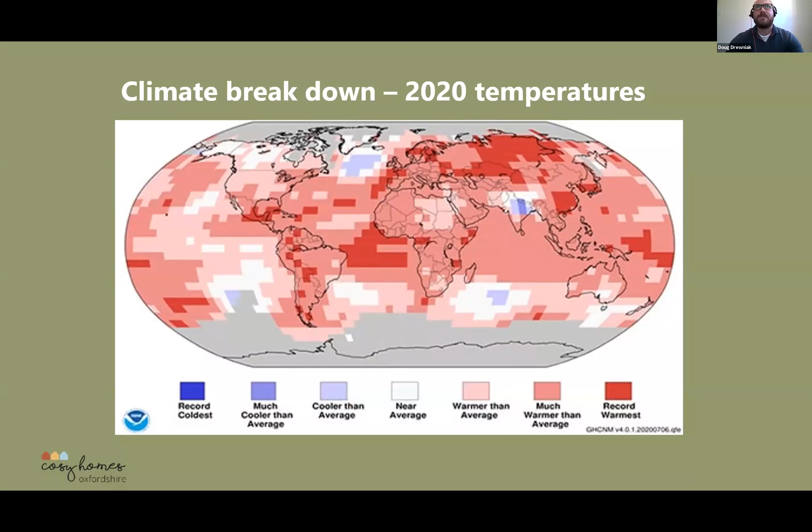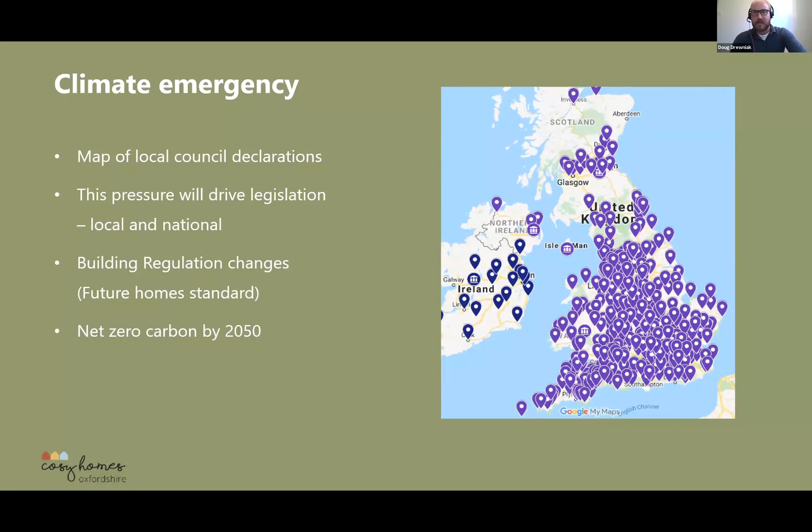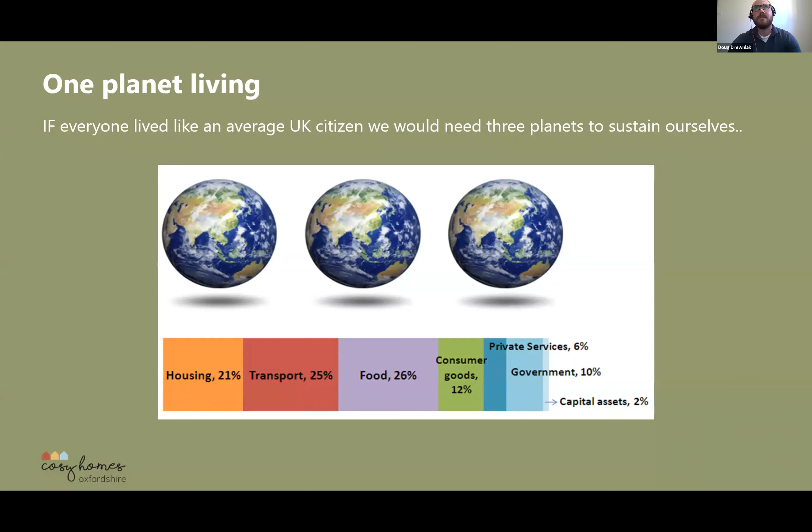A quick note on One Planet Living. My previous job was with Bioregional, and you might have come across that sustainability framework. The basic concept is that if everyone lived like an average UK citizen, you would need 3 planets to sustain our lifestyle. You can see a breakdown of where energy and resources are currently spent, and housing is a huge portion of that. The figures constantly change, but it's around a quarter of that impact we're looking at in terms of energy use in homes, plus all the resources spent fitting out and building new homes. So it has a pretty big impact.

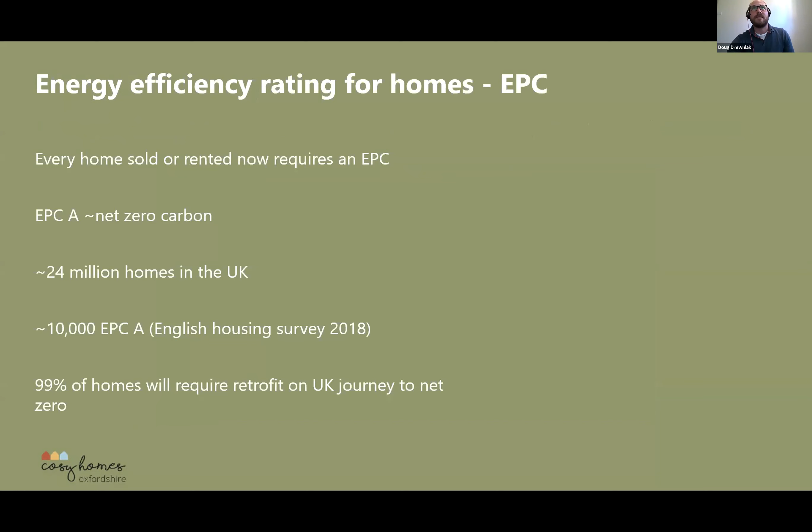So where does energy efficiency come into this picture? This is an example of EPCs, the energy efficiency rating scale you're probably aware of, this colored scale. Every home that is sold or rented now requires one of those certificates. I've already mentioned the drive to net zero by 2050, which means we're looking at all homes, both existing and new, to eventually have an EPC of A, that's 92 points and above, the very top green bar.

Currently, estimates in 2018 by the English Housing Survey, annually produced by National Statistics, suggest there are about 10,000 EPC A-rated homes in existence. If you think the current housing stock of the UK is probably in the range of 24 to 25 million homes, 99% of homes will need to be upgraded, made more efficient, for us to reach net zero carbon by 2050. That's the scale of the problem we're trying to address with retrofit.

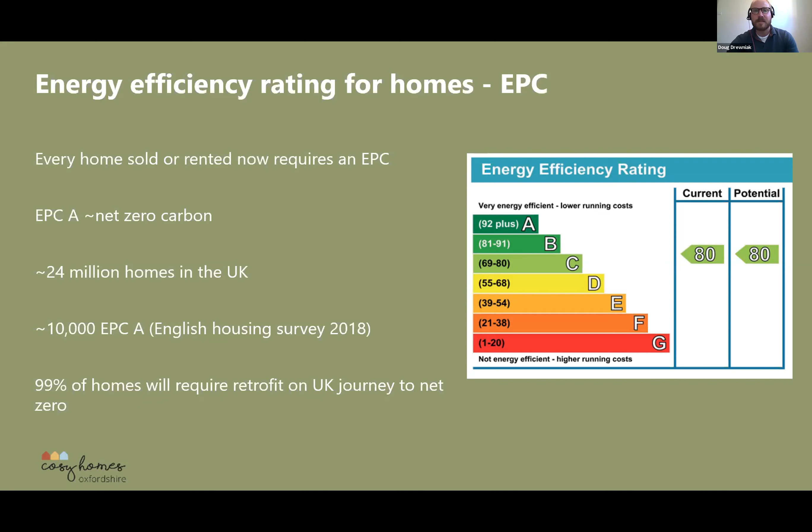Now going into the main part, an introduction of retrofit and an explanation of energy efficiency in various aspects. Retrofit, a very simple definition, is adding or changing something to your home that you didn't have when it was constructed. It's usually aimed to make your home more energy efficient, more comfortable to live in, and cheaper to run in terms of bills and outgoings. The works can consist of exterior works, interior works, and can also cover building services, such as a new heating system, more insulation, or better windows typically. That's the kind of measures we are going to go through in detail today.

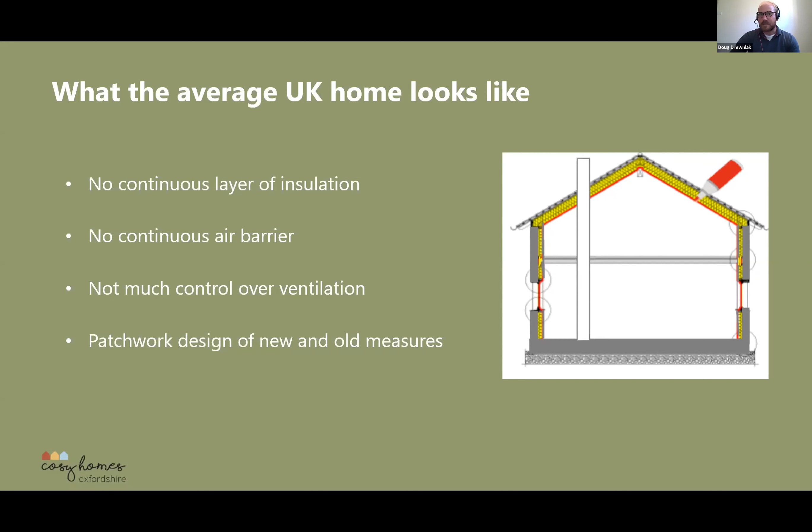So you haven't got a continuous layer of insulation - this yellow line is not continuous. There's no continuous or designed air barrier in most homes, and not much control over ventilation. Ventilation increases and decreases depending on things like wind, weather, and the type of construction. So you've typically got a patchwork design of new and old measures that haven't really been holistically thought out, just added at various stages of the existence of that building. That is typically the starting point.

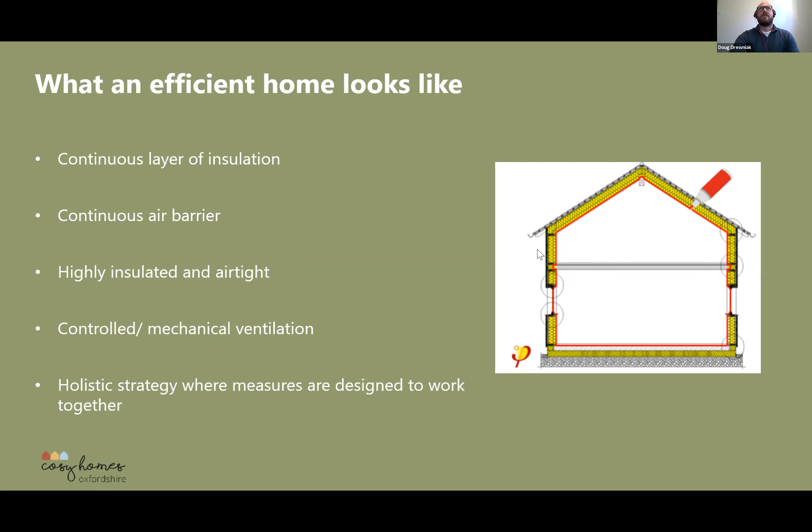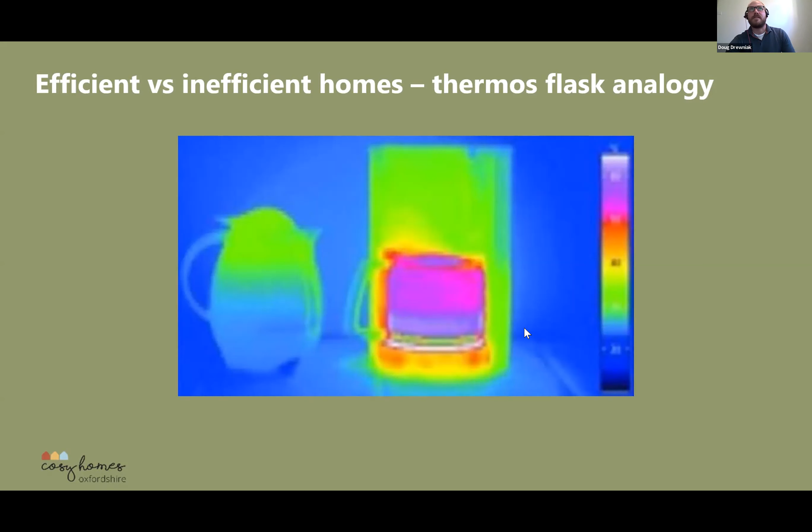This will depend on different cases and your starting points. Ventilation losses are typically around 15 to 20% - that's heat currently lost through ventilation, not having an efficient way of getting fresh air into your house. Windows and doors are currently just above 15%. External walls, most of which now have had some cavity insulation upgrade, are typically responsible for about 15% of the heat loss.

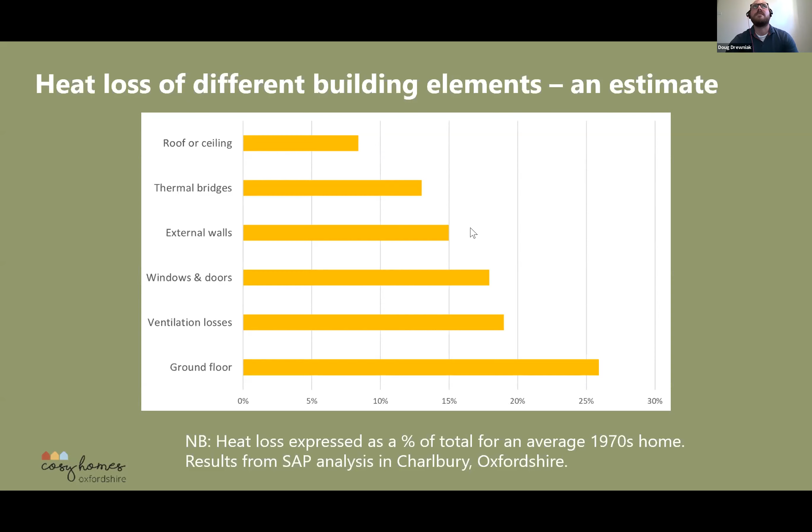So where to start on this journey of retrofit? A good point to start is just taking stock of what the issues are in your home. Those issues can be anything from damp or mold, or typically you just want to create a more comfortable environment, or perhaps you've got a home improvement project already in mind, such as upgrading your kitchen or an extension.

So it's a starting point to design what your priorities are. The next step is to look at your current energy performance. As mentioned already, the EPCs can be a good starting point. Most homes will now probably have an EPC, and some of those EPCs will give recommendations of measures and where those measures might take you. But also just look at your bills, your gas bill, your utility bill, to see the context of how much energy you're using.

Another useful thing you can consider is doing thermal imaging. I do thermal imaging surveys for Cosy Homes, and those are typically done in wintertime, and just show you externally or internally where heat is lost to the outside - where you're currently leaking heat through the fabric, in terms of a useful colored picture image.

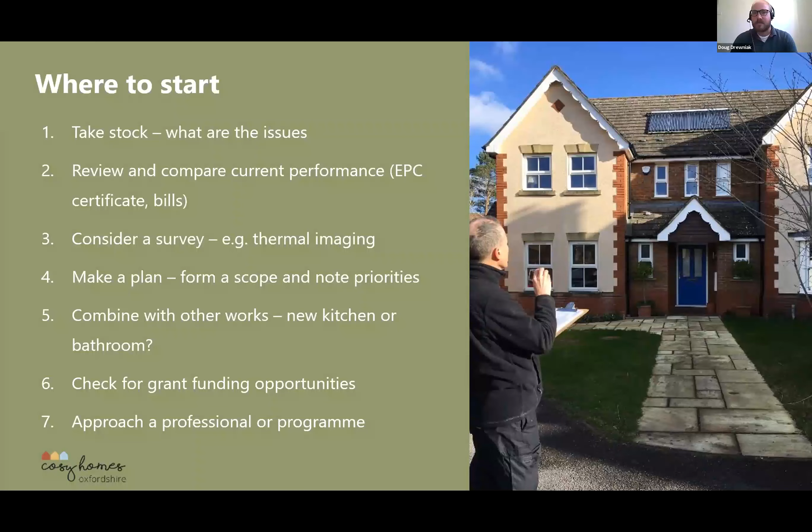And now really starting to go into some of the specific measures. So we've covered the basics of what you want to do now - some of the more technical bits and pieces to consider.

And the first one's wall insulation. With wall insulation, the first question is external or internal. External is typically more efficient - if you think of that sort of wrapping around a continuous layer of insulation, it's a more efficient way of reducing heat loss.

Typically, what you're looking at is between 150 and 200 mils of insulation that is then finished with external render typically, but you can also finish that off in timber cladding or brick slip.

Whether you can do external wall insulation will also depend on your area, and if your building is listed, for example, or in a historic area in that context, or perhaps even want to preserve the look. If you have a brick or sandstone finished home, then the next best thing to consider really is internal wall insulation. Internal wall insulation is suitable for most homes.

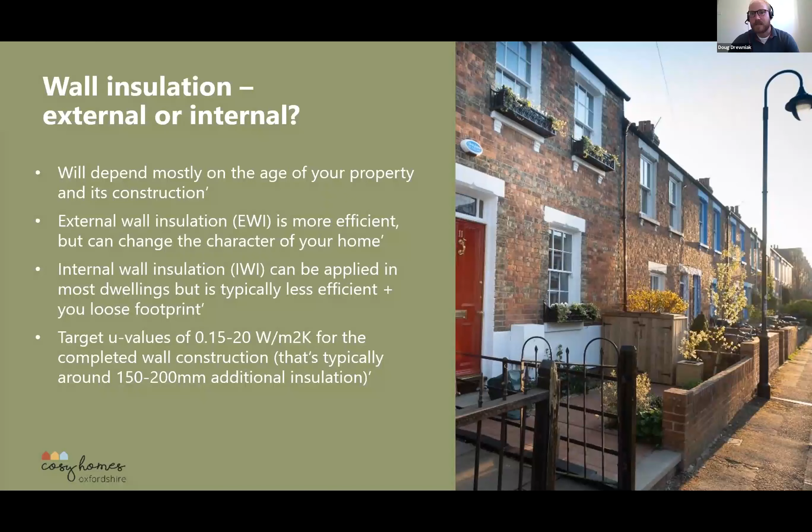Moving on to briefly talk about cavity insulation. Most homes will now have had some sort of cavity insulation, typically blown fiber or beads. You get a builder or contractor that inserts that between the internal wall leaf and the external wall leaf.

Depending on the type of material used, you sometimes get slump, so the insulation material gradually settles over time and opens up other areas where you might get heat loss again.

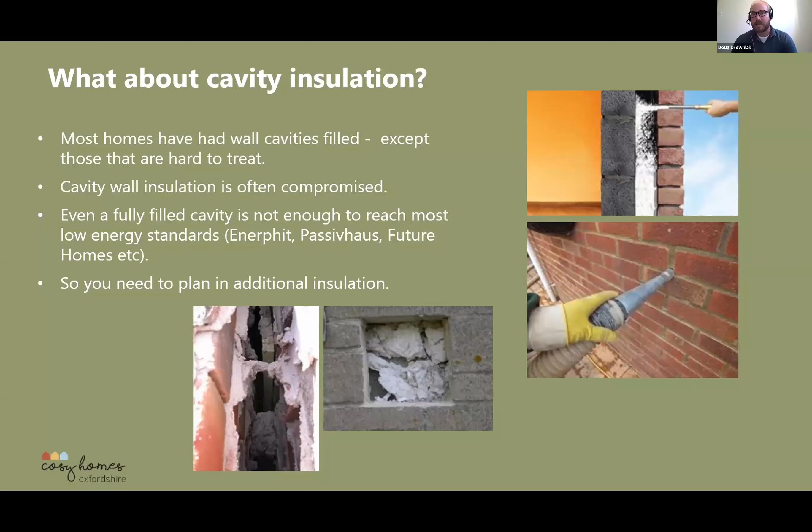A thing to mention is even very well done cavity wall insulation, or topped up cavity wall insulation, will probably need additional insulation to get you towards that net zero carbon home that we've already mentioned. That drive to very efficient homes - cavity wall insulation will not be enough to achieve that, so you will have to have additional either external wall insulation or internal wall insulation.

The next thing is loft or roof insulation. Most homes will probably have a cold roof design, meaning you've got insulation applied horizontally along the loft floor. Might be around 150 mil mineral wool, which is relatively standard.

Other homes, a smaller percentage, might have a warm roof design, meaning the insulation is placed in the roof slope between the rafters, and typically you have to work within the size of your rafters, whatever the dimension of the timbers is. You can play with how much insulation you can fill.

Nowadays, to achieve decent U values, it depends on the materials you use - different insulation products have different efficiencies and resistances. If you're just looking at something very basic such as mineral wool, you might want to achieve 350 to 400 millimeters of thickness.

Another thing to watch out for is storage. A lot of people store boxes and various items in the loft, and that compresses insulation. So if your starting point is 200 mil insulation and you have a lot of boxes in your loft that compress it to half of that thickness, you're probably also looking at half the performance. So performance does decrease with insulation being compressed - that's something to be aware of.

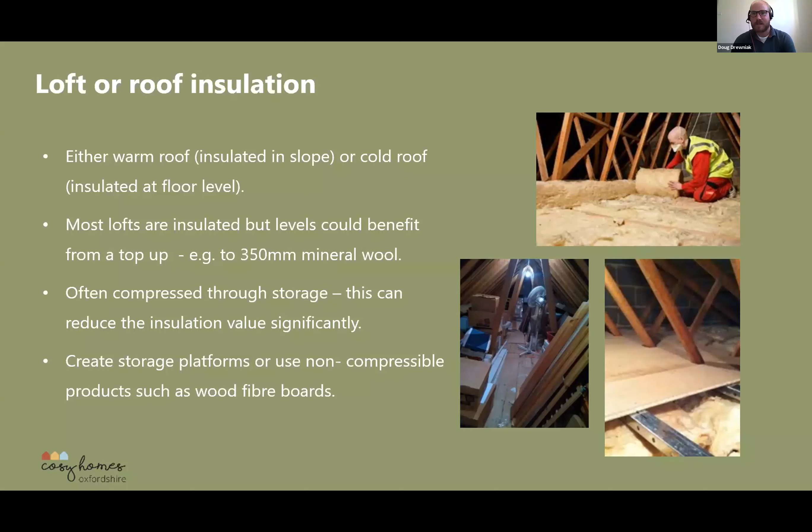Brief mention of heating systems. A lot of people will be on gas in Oxford, and gas boilers are most cost effective to deliver heat, but you should be aware that they're slowly being phased out.

In the new build sector, that cutoff is 2025, where new homes won't be allowed to have fossil fuel heating systems in place. There's probably going to be a small overlap until that kicks in with existing homes - that might be 5 to 10 years. So you're looking at the 2030s where gas might be phased out, but there's a lot of movement in that field, so that's certainly not set in stone yet.

What you should also be aware of is the UK electricity grid - the supply of electricity is decarbonizing very rapidly. We're projected to hit parity between gas and electricity this or next year. A lot of the time, on a sunny or windy day where you have a lot of renewable energy contribution, that is sometimes already lower in carbon emissions.

Electricity is lower in carbon emissions than gas, so that is rapidly happening - the future does look very electric. Electricity is also more expensive than gas, already mentioned, so typically 2 to 3 times more expensive.

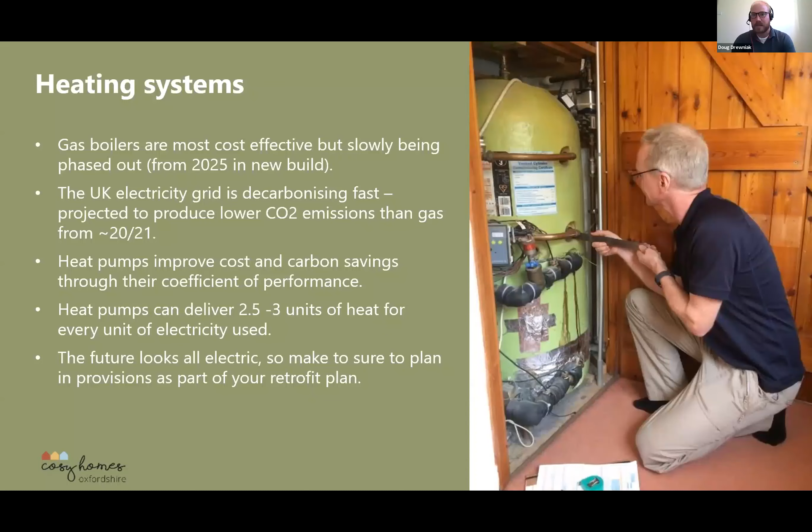The coefficient of performance means for a unit of electricity that you use in your heat pump, you typically get about 3 units of heat. So that conversion is 1 to 3, which is very efficient. If you're only on direct electrical resistance heaters, you might have 100% efficiency, but because electricity is still more expensive, you're looking at higher costs. A heat pump is a neat way of both achieving low carbon emissions for heating systems, but also unlocking the cost element of that.

The next item to look at is windows, especially double or triple glazed units. Nowadays there's not that much difference between a very efficient double glazed unit and an inefficient triple glazed unit. What you typically want to aim for is that combined U value of glazing and frame of better than 1.2. Another useful metric to be aware of is the window energy rating, where you're typically looking at B or better.

A lot of emphasis with window systems is position. You typically want to have the window in line with your main layer of insulation. So if you have external wall insulation, you want to avoid the window system being in line with just masonry or proud of that. That's a neat trick to think of for position, but also integration - you want to have an airtight link back to your wall, typically taped or sealed in other ways.

Another thing to be aware of is that triple glazed systems will raise internal surface temperatures, so they tend to be more comfortable with less drafts. Drafts sometimes appear just from the difference in surface temperatures - you get secondary drafts from the window surface being cooler than the rest of the room, so triple glazed windows can avoid that. They're also really good at dampening noise, so if you're beside a busy road or a school, triple glazed windows can really alleviate those noise-related problems.

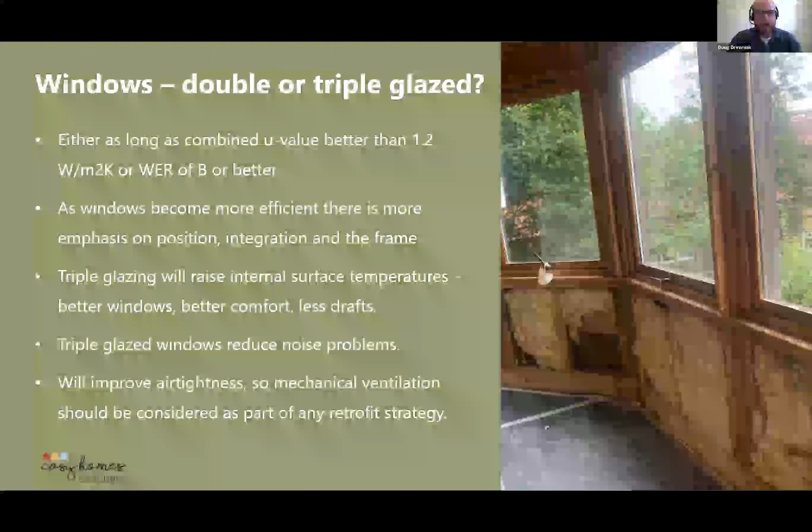That's typically kitchens and bathrooms, and then supplies fresh air into bedrooms and living areas. So you have a whole range of systems already mentioned - you've got MEV systems, MVHR systems, so systems that recover heat and some that don't. You've got centralized systems, a single fan and ducting, or decentralized systems, which would be multiple small fan units. There's not one system appropriate for any one situation - it depends on circumstances, space, and the type of fabric. Those kinds of questions can really be asked with your retrofit coordinator, or your architect or builder.

Any more? Should we push? We have had a few more measures, but I think I'll leave them for now so we can get through the rest of the content and pick up at the end. Just as you mentioned retrofit coordinators, we have had a question from Connor about the role of the retrofit coordinator and how you could find a local one. Any advice on that?

A retrofit coordinator is typically someone who has undergone training, so they've got a good working understanding of different measures, how they work together, and good principles of energy efficiency. Your coordinator will typically sit halfway between the builder and architect, or builder and client. They help you with coordination, planning, design, taking a lot of that stress away from you, and help you avoid common mistakes that naturally happen if you're new to this subject. They also have a vetted list of suppliers and builders - trusted contractors - to get rid of the bad eggs and people who do unreliable or bad measures. So they can be really helpful in that process.

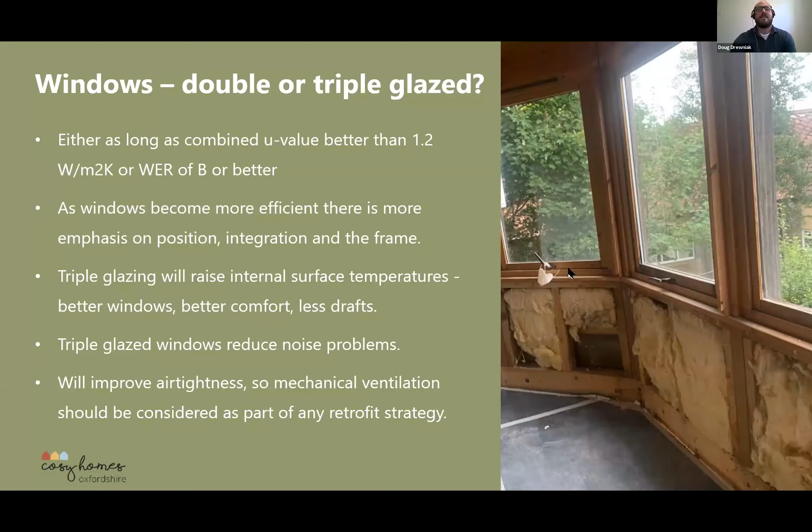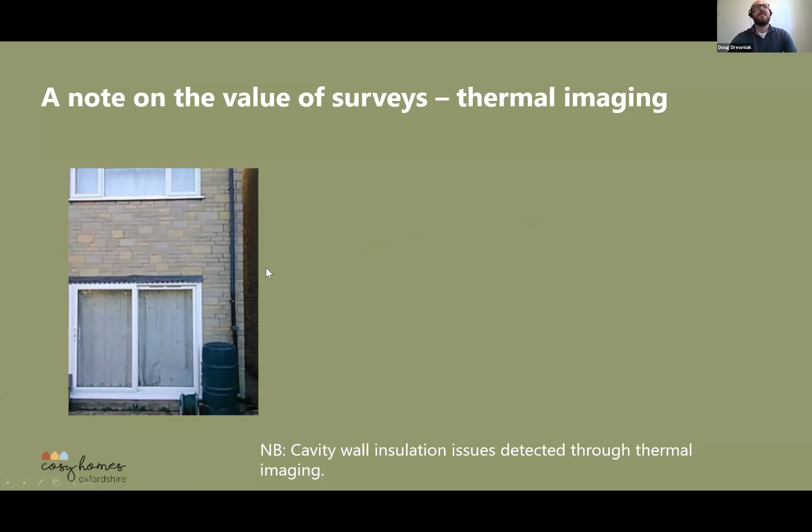Okay, so we've covered a lot of different elements of the build, and now just a really quick note on the value of having surveys done. This is a quick stop on thermal imaging - it can really be helpful in identifying where you're leaking heat from and what the issues are. This image is from a 1970s property we surveyed in Charlbury. It's an external shot of the back of the house, quite typical construction - you can't really see any issues looking at it with the naked eye.

The next shot is a thermal image overlaid onto that. You can probably see at the lower end of the door a reflection of myself - that's just my heat signature. But if you're not trained in this, the image probably won't tell you too much either. So what you can then do is an analysis - set the range, the temperature range you'd like to look at, which gets rid of the noise and just highlights the issues. That's the last picture - red is where heat is currently lost at an elevated rate. You can see under the windows on the first floor there's a large area of uninsulated cavity wall. In this instance, there's a high chance the insulation infill material has slumped, settled over time, and left a gap where heat is currently lost through the wall. Those kinds of things can highlight external issues you're probably not even aware of just from living in a home.

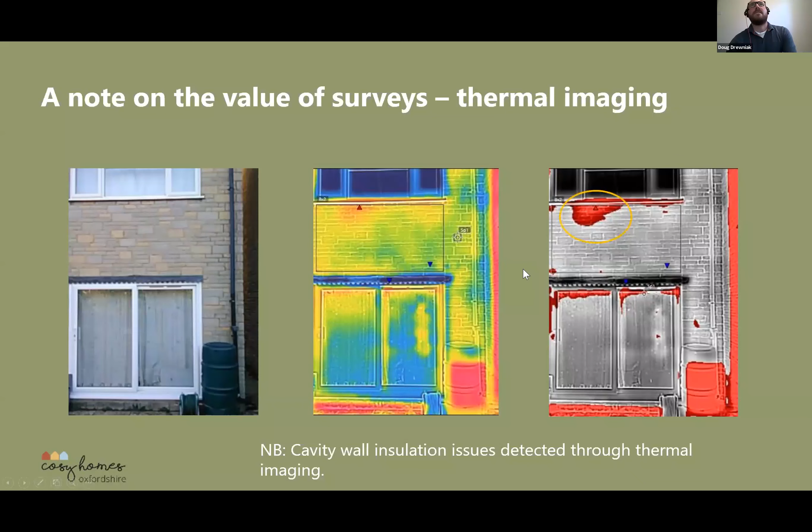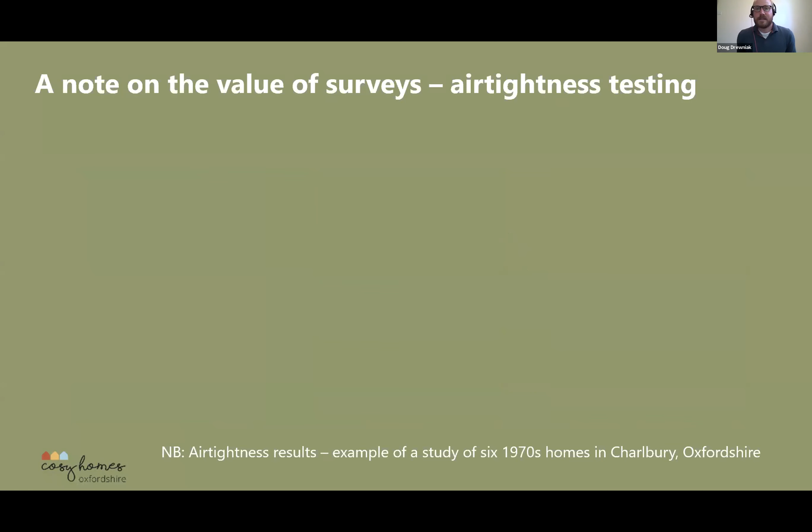Another note on the value of surveys - air tightness can also be quite useful, because air tightness values can range significantly from one build to the next. They depend on the builder, the type of materials used, the type of design, and so on, so it's hard to guess without doing a test what that might be for your house. This is results from a study we did again in Charlbury - six homes. You can see the average air tightness, currently marked by the dotted line, is roughly below 8.

Just ignoring the units at the moment, lower is typically better. So towards 1 is a very airtight home, and above 12 you're looking at quite a leaky dwelling. The average here is just below 8.

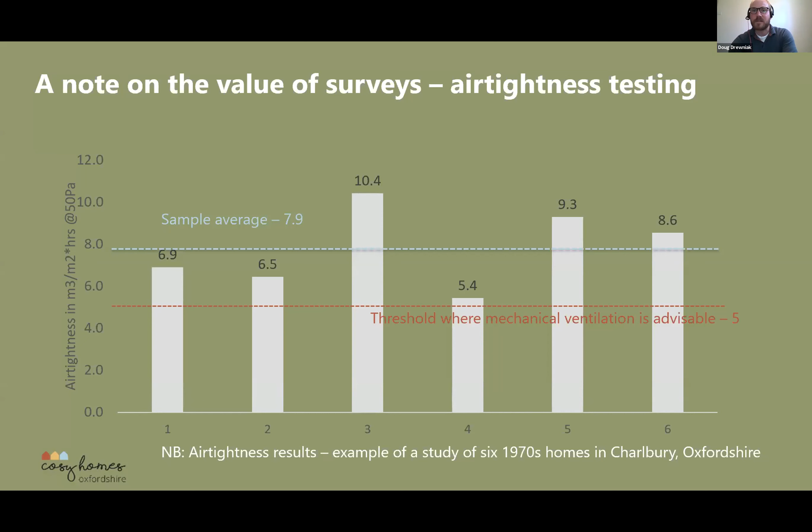7.9. The threshold where you should consider mechanical ventilation, the systems we already mentioned, is advisable below 5. Below 5, your dwelling's typically quite airtight, and that could lead to things like moisture buildup. You certainly will never suffocate in a very airtight home, but you might have buildup of moisture just from cooking and so on.

Just to illustrate, from SAP modeling we know that the total heat loss from ventilation—anything planned and unplanned, so opening windows but also infiltration from cracks in your fabric—can be 20%.

Building regulations require roughly, depending on the size of your home, 13 liters per second, which is 45 meters cubed per hour on average.

Based on that average air tightness that we measured in Charlbury, we were roughly double the recommended ventilation rate for those buildings. So we were over ventilating those homes.

What typically happens is you're over ventilating in the rooms that you don't need, and you're under ventilating in places like bathrooms and kitchens. That's what typically happens. Without a mechanical ventilation system that does that in a controlled way, there are issues around where that happens and doing it in a controlled manner.

Moisture is produced by anything from cooking to breathing. Sleeping at night, you create quite a lot of moisture, but also washing. If you imagine one of those office water dispensers, that can be anything from 5 to 15 liters—that is typically what a household produces in moisture per day.

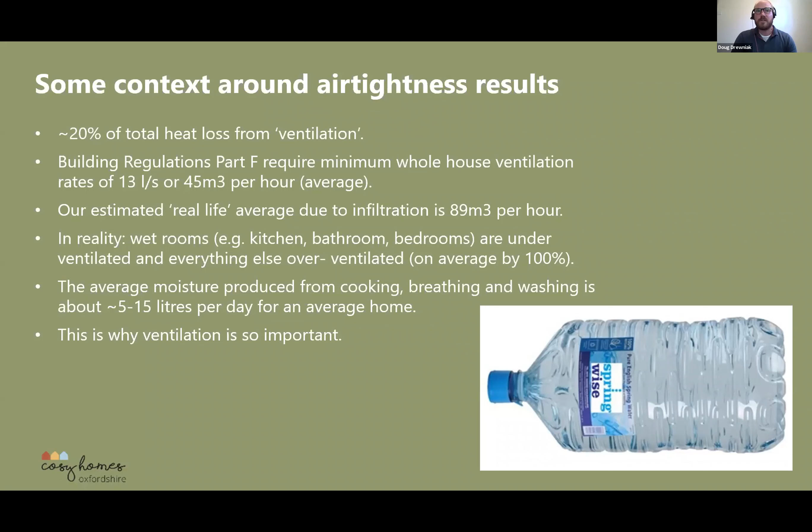The mechanical ventilation system we've already mentioned—most homes are over ventilated in common areas and under ventilated in wet rooms. Ways to avoid that include single room decentralized systems that you can use, which can also be combined with MVHRs, so you get the heat recovery.

If you currently have an intermittent fan in a bathroom, you can replace that, using the same opening in your wall, with a product that recovers the heat but is also constantly running at a very low level.

You can again combine that with demand control, so you can have a CO2 or a moisture sensor that senses when that fan needs to ramp up and down to increase and decrease ventilation. There are a lot of different systems out in the market, and again, your retrofit coordinator can help with that process.

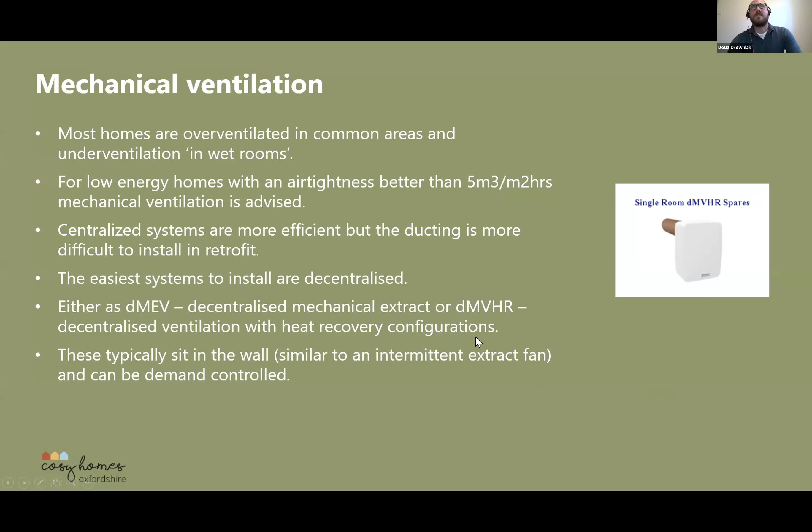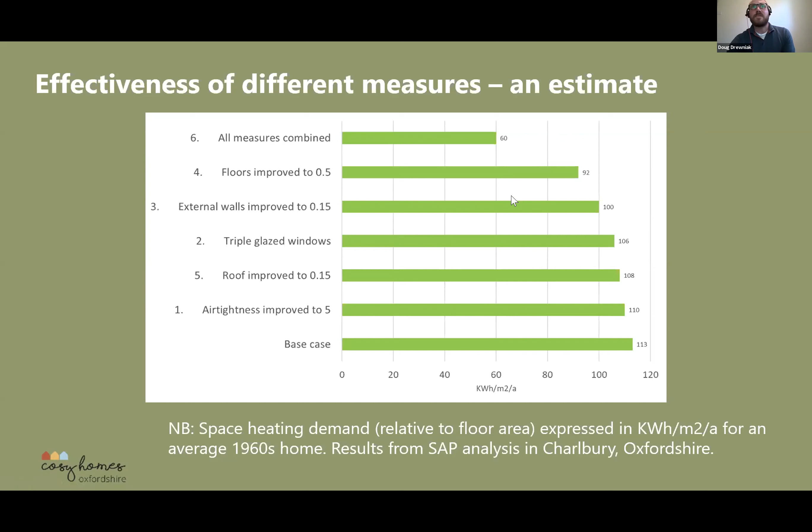So that's to give you a bit of a feel of what different measures might do. In summary, things to consider when planning are the what and why: assess your starting point, compare, plan, and also look to future-proof, so that you're doing this once and doing it to the right scale and effect.

What order to prioritize: if budgets are restricted, you might want to start on the very effective measures, the low-hanging fruit, so to speak. That can be a north-facing wall or somewhere where you're really losing a lot of heat.

It's really worth considering the lifetime of different products and measures, repair cycles, and combining those. So if a roof needs doing, combine that with the right levels of insulation. Also involve a professional retrofit coordinator if you can, which will make the process a lot easier, so you get quality and avoid common mistakes that might happen if you do this by yourself without a track record and experience of what you need to watch for. It's really about shortening that learning curve.

Another tip is to leverage grant funding where that is available.